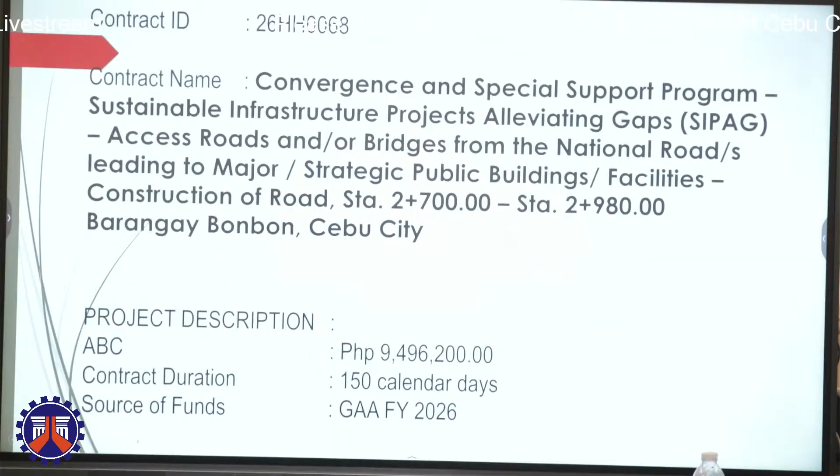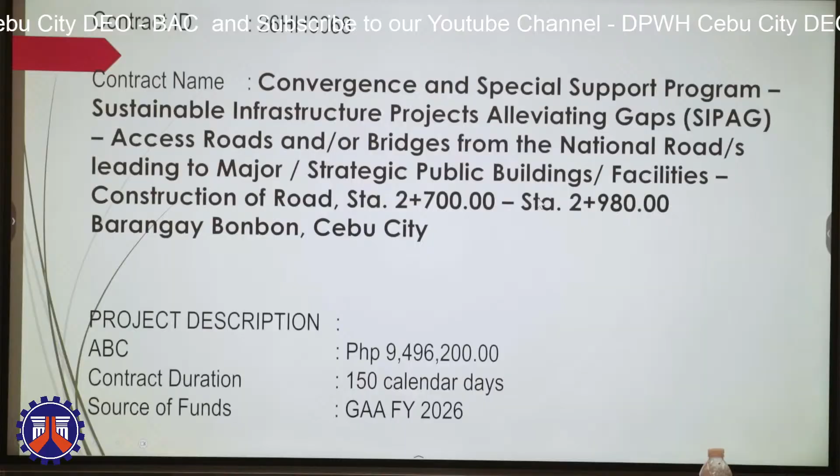For our first project with the contract ID 26HH0068, contract name Convergence and Special Support Program, Sustainable Infrastructure Projects Alleviating Gaps, Access Roads and/or Bridges from the National Roads leading to major strategic public buildings or facilities, construction of road station 2700 to station 2980, Barangay Buot, Cebu City, and approved budget for the contract of 9,496,200 pesos only, and contract duration of 150 calendar days. Source of funds GAA FY 2026.

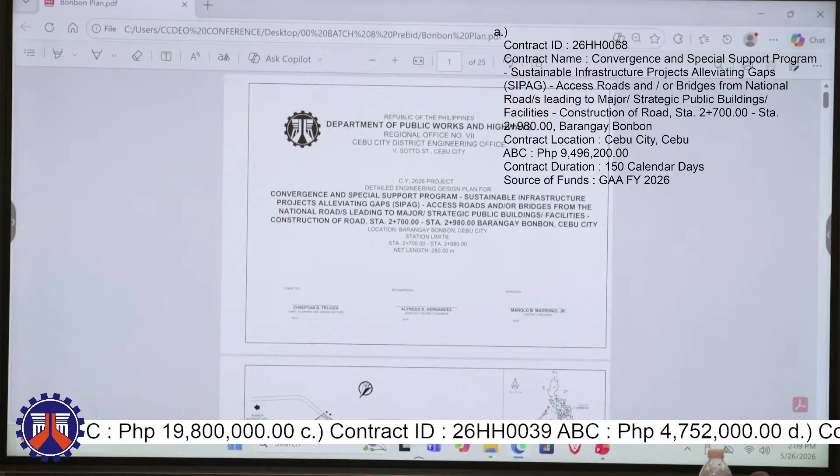So here we have the net length for this project is 280 meters. Then we have the location plan for this project. We also have the geotag photos for easy navigation. Proceeding to the scope of work, we have surplus common excavation, structure excavation, pipe culverts and drain excavation, and embankment. For the PCCP, we have subgrade preparation, aggregate sub-base course, PCCP 0.20 meters thick, 14 days curing. For the drainage structures, we have pipe culverts, line canal, stone masonry, and concrete curb.

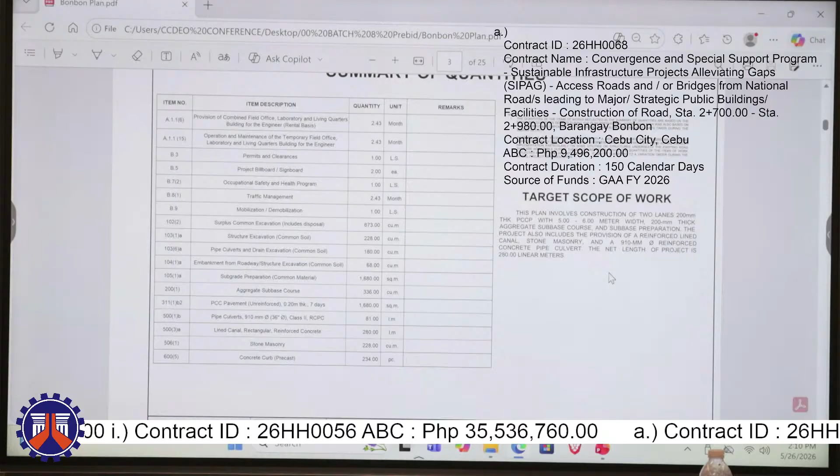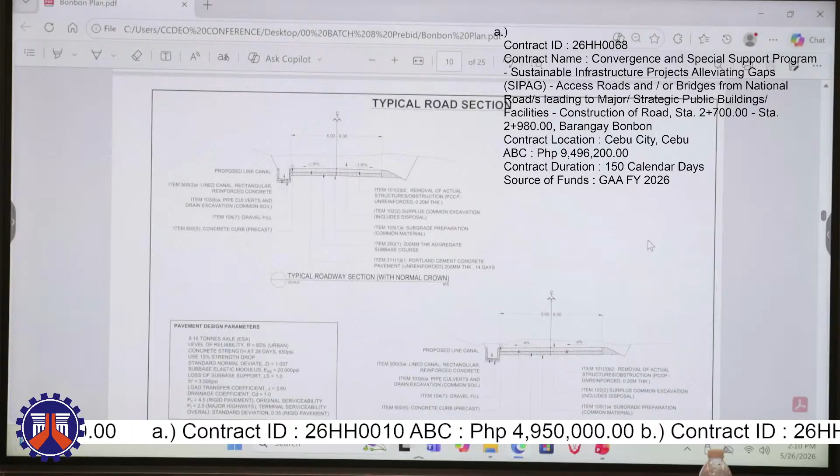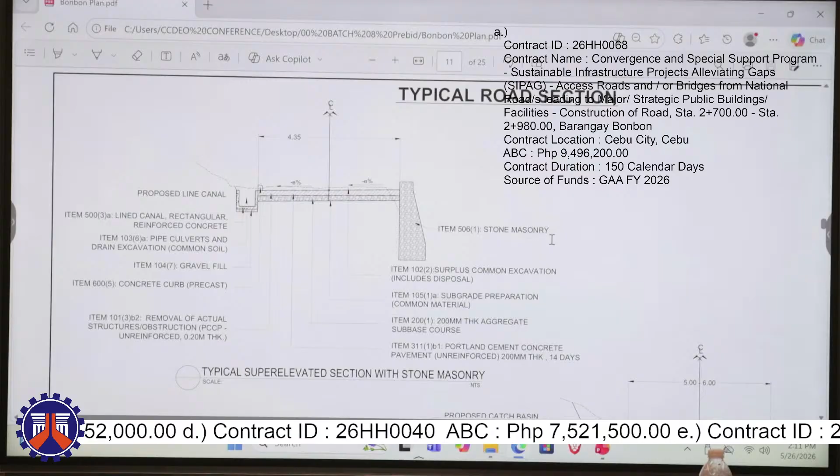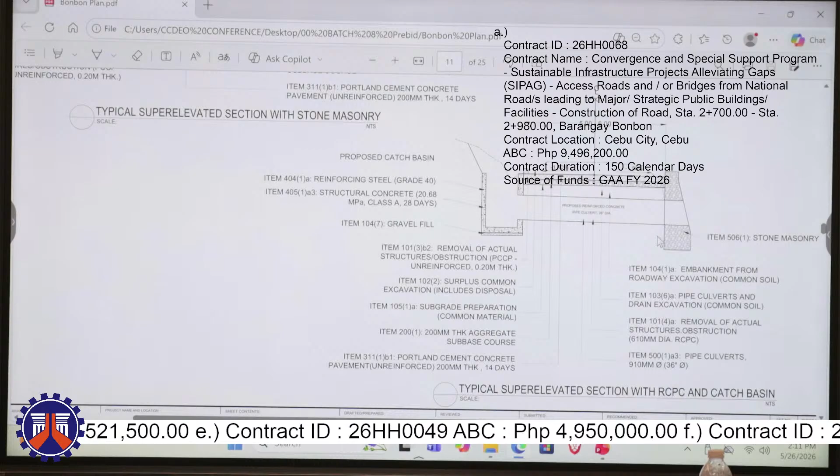So this plan ranges from 5 to 6 meters in width, 200 millimeters aggregate sub-base course, then 910 mm reinforced RCPC. Here we have the general notes and technical specifications, and the typical roadway sections. As you can see, left side line canal, and the shoulder on the right side. Here we have the super elevated section, still left side line canal. Then the typical roadway section with the right side stone masonry. Lastly, the cross drain: left side catch basin, right side stone masonry. I think that's all for this project.

To continue, we have the contract ID 26HH0069 with a contract name, Convergence and Special Support Program, Sustainable Infrastructure Projects Alleviating Gaps, SIPAG, access roads and or bridges from the national roads leading to major strategic public buildings, facilities, rehabilitation of road with drainage, station 0+163 to station 0+288, Barangay Padilla, Cebu City, Cebu, with an ABC amount of 9,504,040 pesos only, and a contract duration of 170 calendar days.

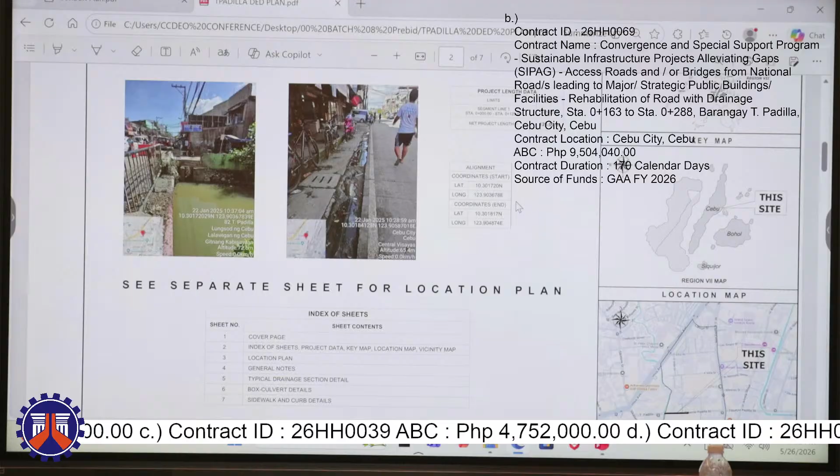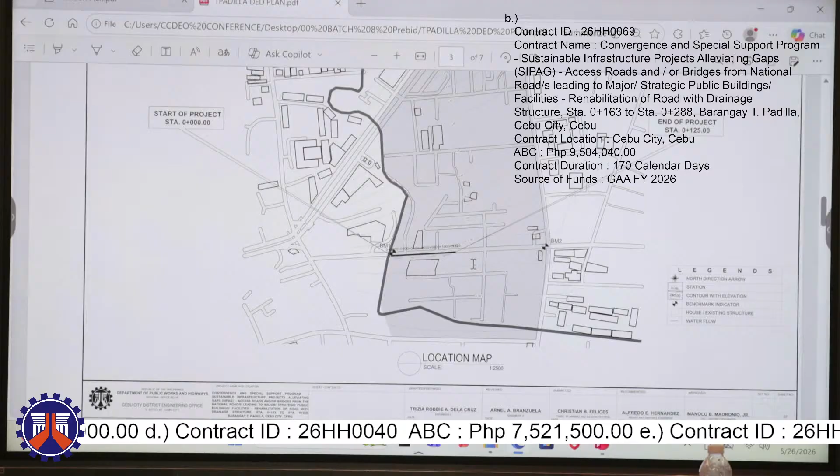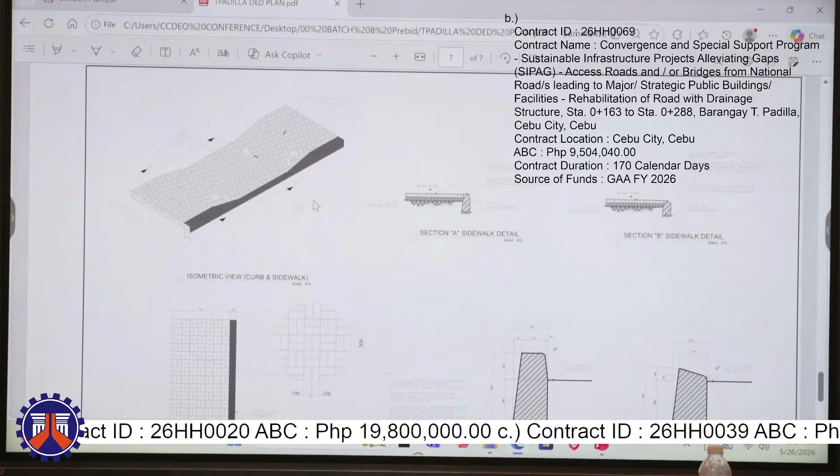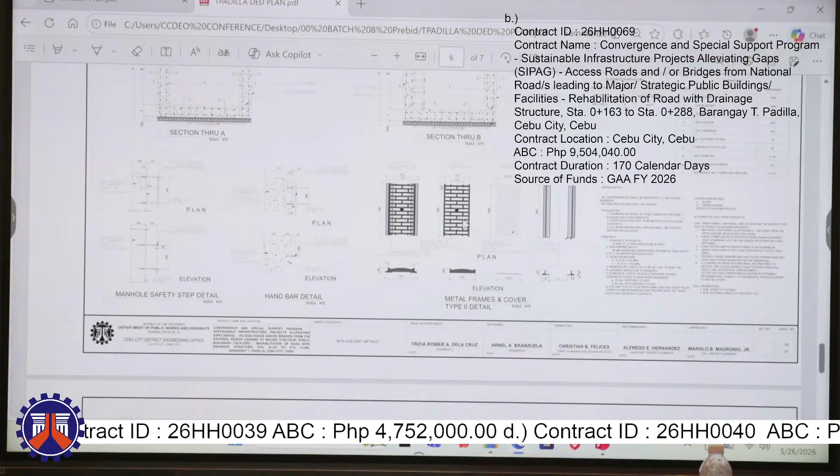And then for the typical section, we'll be constructing a box culvert intended to drain ang inundation sa area sa T. Padilla. Outfall ang Laug River. Also we have the typical PCCP. The thickness is 300 mm. And we'll provide sidewalk as cover and line canal. Magkonta og line canal bag-o. Also curb and gutter, and the steel grating manhole cover. Also naay mga details diri for depression sa atong sidewalk. So basically mo na ni ang scope for this contract ID 26HH0069.

Moving to the next, contract ID 26HH0070, contract name Convergence and Special Support Program, Sustainable Infrastructure Projects Alleviating Gaps, access roads and or bridges from the national roads leading to major strategic public buildings or facilities, construction of road station 2,600 to 2,870, Barangay Sirao to Barangay Guba, Cebu City, with the ABC amount of 23,422,000 pesos only. Contract duration of 105 calendar days and source of funds GAA FY 2026.

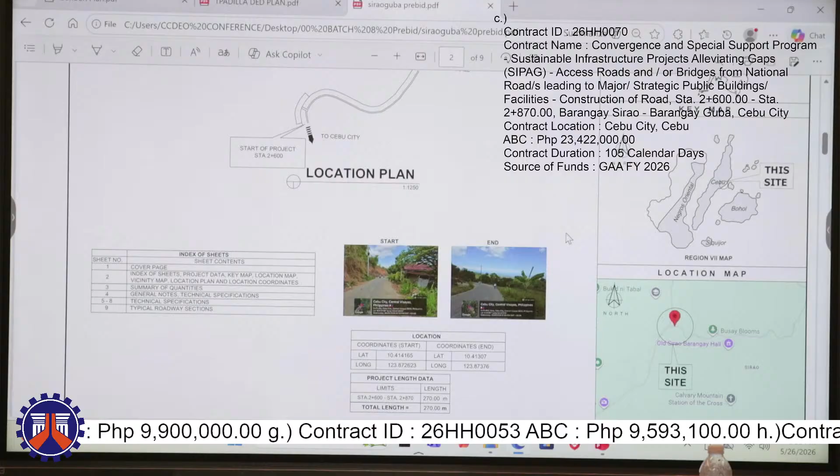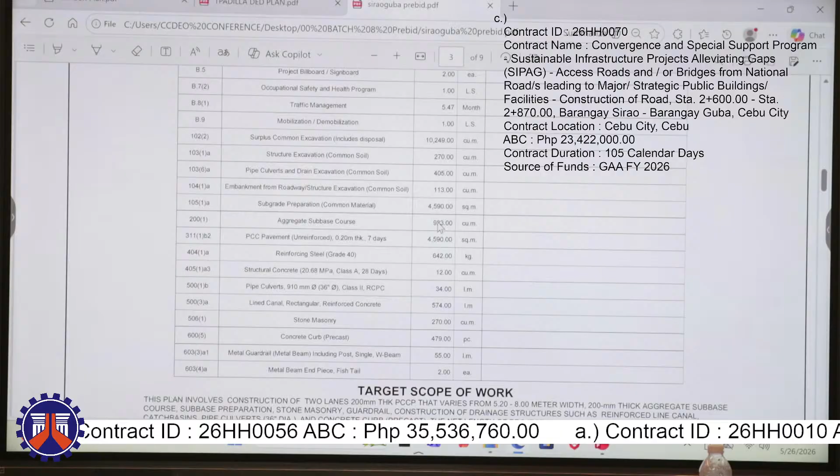So, as you can see, the net length for this project is only 270 meters, and the location is along the national road. We also have the coordinates so that we can easily navigate through the site. Next is the summary of quantities. The scope of work includes surplus common excavation, structure excavation, pipe culverts and drain excavation, embankment, and for the PCCP, subgrade preparation, aggregate sub-base course, PCCP 0.20 meters thick, 7 days curing. For the catch basin, reinforcing steel grade 40 and structural concrete, and for the drainage structures, pipe culverts 910 mm, line canal, stone masonry, concrete curb, and lastly, guardrail.

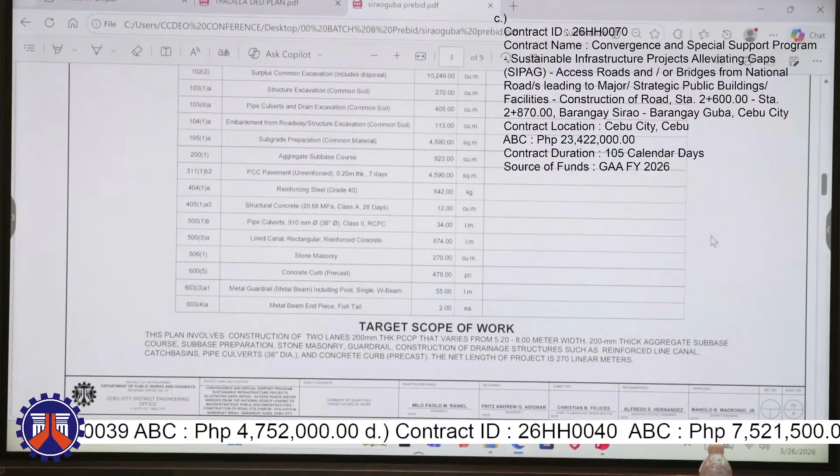The width of the road for this project ranges from 5.2 to 8 meters, 200 mm thick aggregate sub-base course, then 36 inches diameter RCPC. Here we have the general notes and technical specifications for this project.

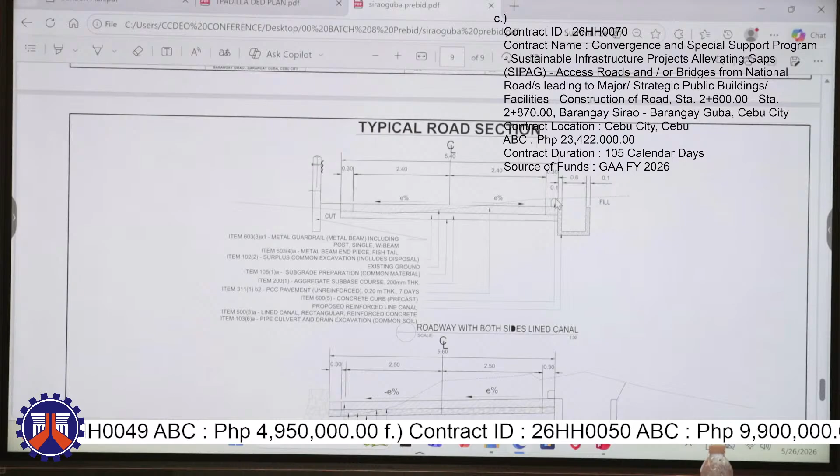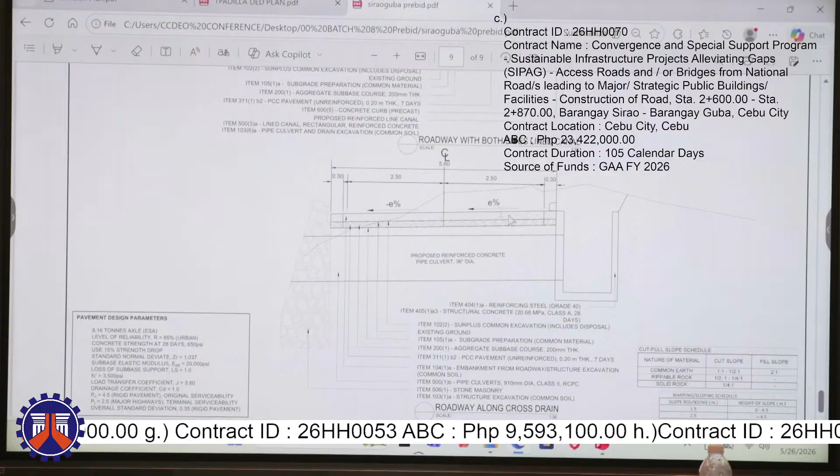Then we have the typical roadway section. Here we have left side guardrail and right side canal. We also have the concrete curb. And then next section, we have the cross drain. Right side catch basin. Then left side stone masonry with 5.6 meters in width. I think that's all for this project.

Good afternoon. For our next project, we have contract ID 26HH0071, Convergence and Special Support Program, Sustainable Infrastructure Projects Alleviating Gaps or SIPAG, access roads and/or bridges from national roads leading to major strategic public buildings facilities. Construction of road with slope protection structure, Station 6+700 to Station 7+420, Barangay Buot, Cebu City, Cebu. Our approved budget for the contract is 37,984,800. Contract duration is 234 calendar days, and our source of fund is GAA FY 2026.

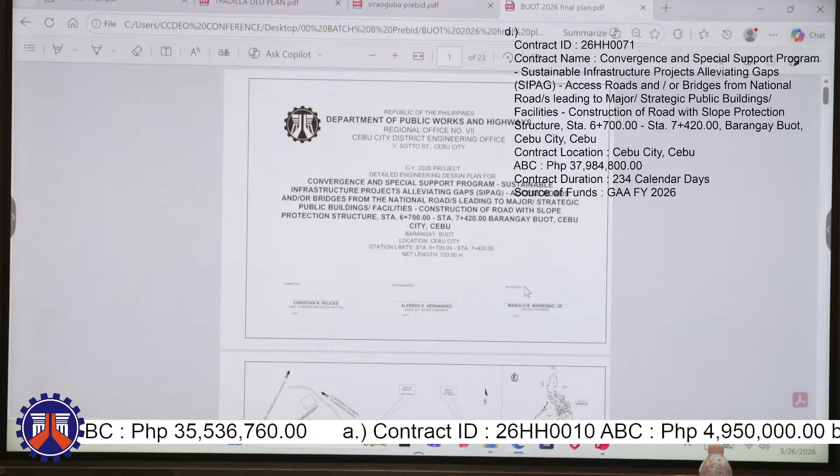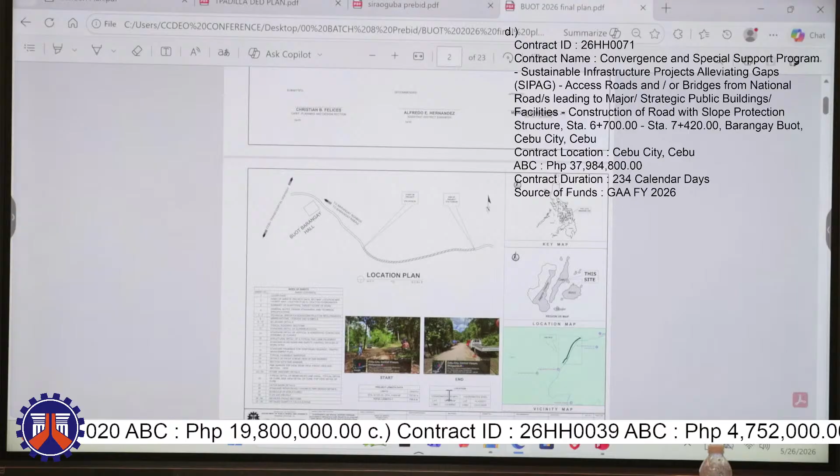So our net length of the project is 720 meters. Project is located after Buot Barangay Hall. This is the continuation of the previous project, year 2025. So this is our start. Then we end after 720 meters. This one. And our summary of quantities.

We have removal of existing structures, PCCP. We also have removal of concrete, surplus common excavation, structure excavation for the slope protection, pipe culverts and drain excavation for the drainage structure, embankment from roadway structure excavation, gravel fill for the drainage structure also.

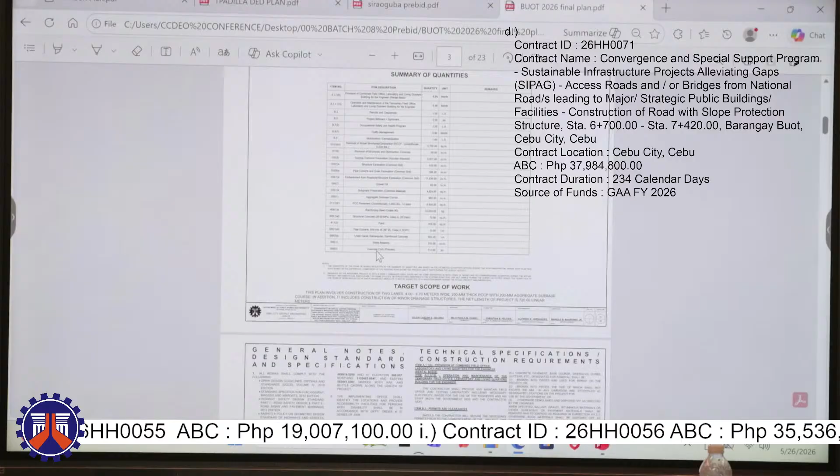For the main road, we have the subgrade preparation, aggregate sub-base course, and we have the PCCP pavement, 0.2 meter thick, 14 days. Reinforcing steel grade 40 and structural concrete is for the slope protection structure. Then we also have the paint for the concrete curb. Then we have the pipe culverts and lined canal for our drainage structure, the masonry also for the slope protection, and lastly, the concrete curb precast.

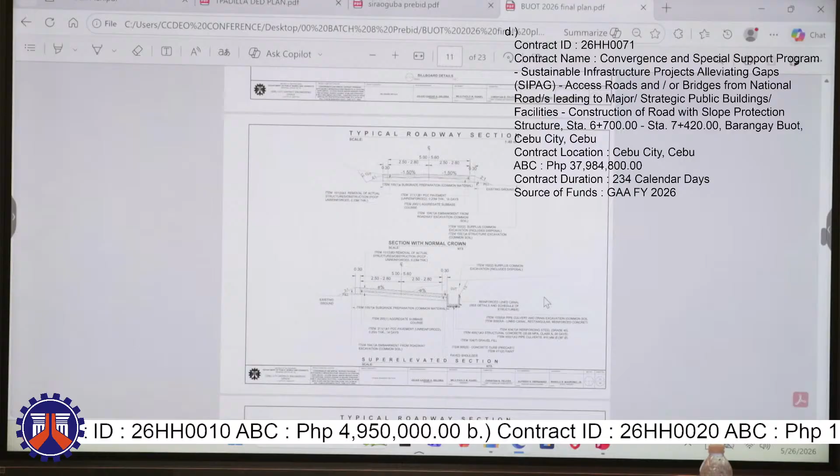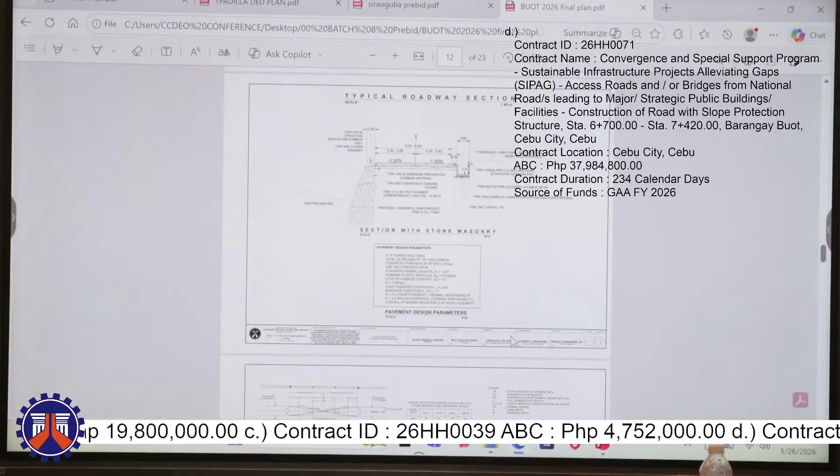This one is the general notes and technical specifications of the project. Then we have our details for the billboard. And we have the typical roadway section. First is the section for normal crown. Then we have super elevated section with the right side lined canal. And next is the section with stone masonry at the left side and also lined canal at the right side. Then next is the details for the super elevation and horizontal and vertical curves. Also, we have the structural detail for two-lane pavement.

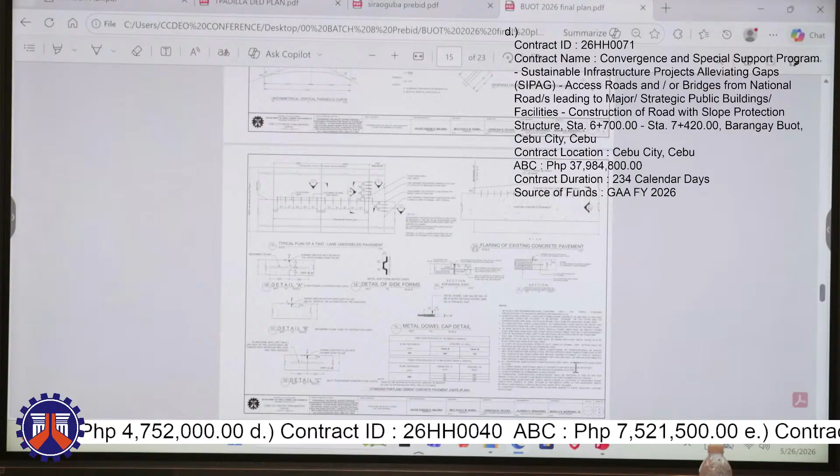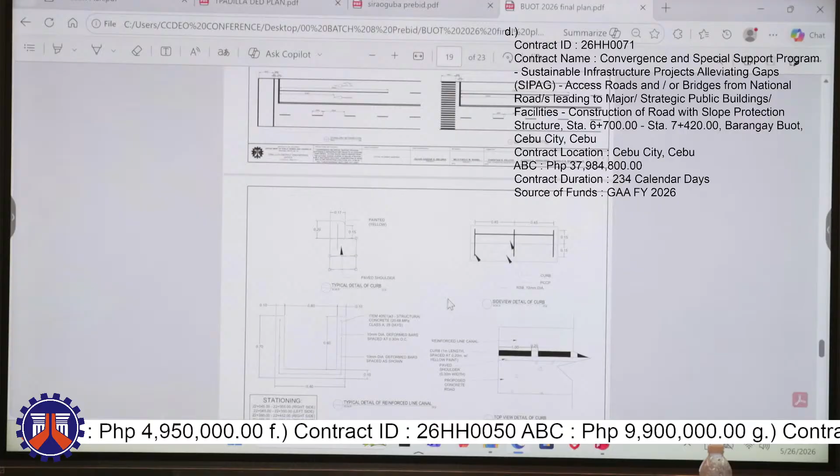Then we also have these safety control devices at sites. Then traffic management. Also, we have the typical pavement marking details. And this one is the lined canal details. Also included is the detail of curb. Then we have the catch basin details and our stone masonry details. And lastly, the details for the RCPC. And that's all for this project.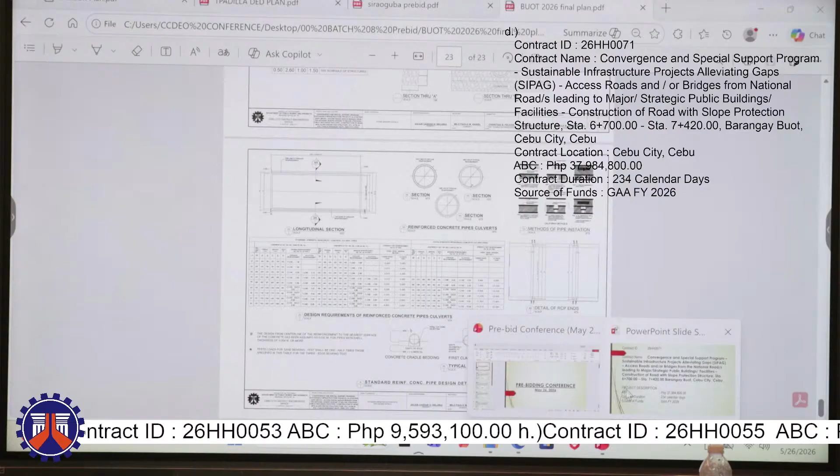To continue, we have the 26HH0075.001, Ensure Safe and Reliable National Road System, Asset Preservation Program, construction, upgrading, rehabilitation of drainage along national roads, primary roads, Bacalso Avenue, Cebu South Road with section ID SC00004CB, kilometer 4-014 to kilometer 4+134, Cebu City, with an ABC amount of 128,538,965 pesos and a contract duration of 313 calendar days.

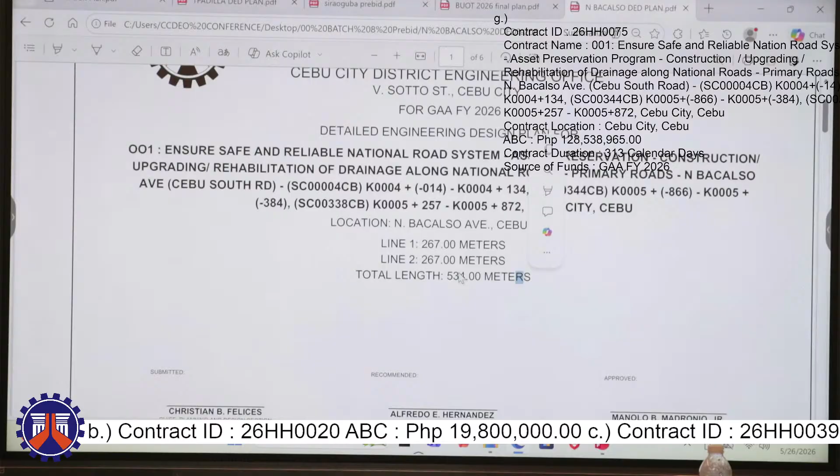So we have a total length. We have two lines for this one. We have line 1, we have 267 meters. And for the line 2, we have the same 267 meters and a total length of 534 meters for this contract.

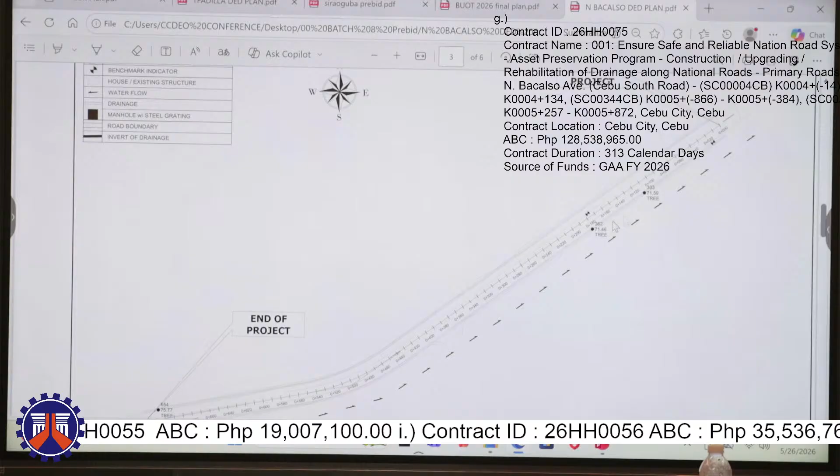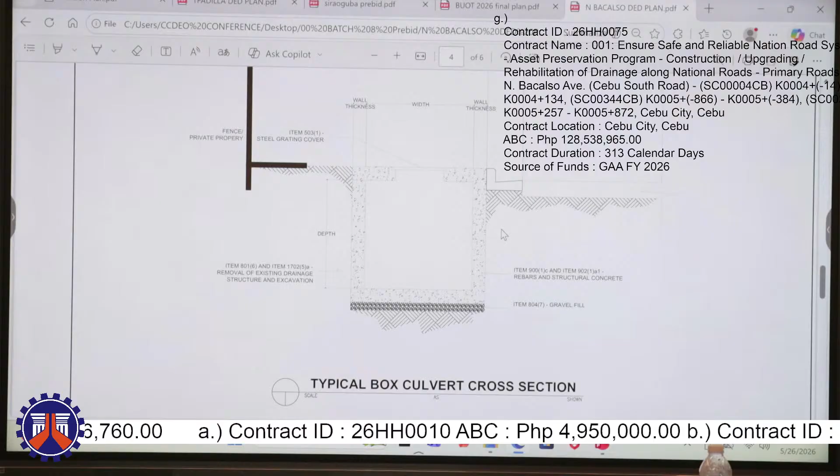So for the typical section, we have the typical box culvert cross section, no. Also included in our scope is the curb and gutter. And then also sidewalk for this box culvert. On top is a sidewalk, no. And also for the manhole covers.

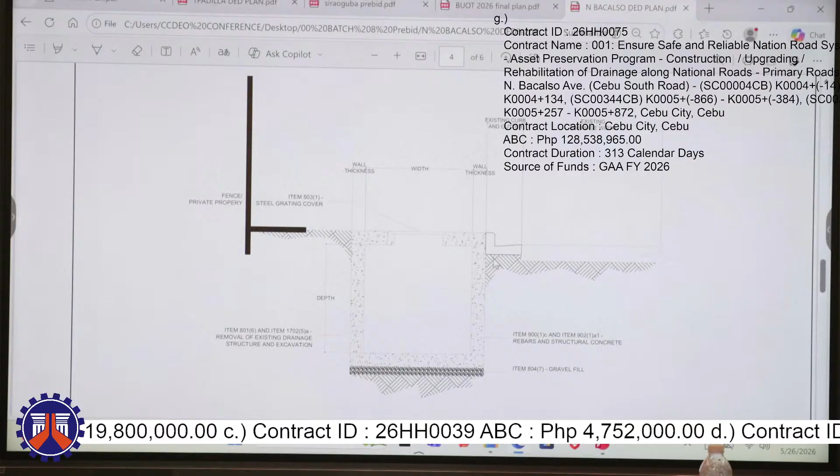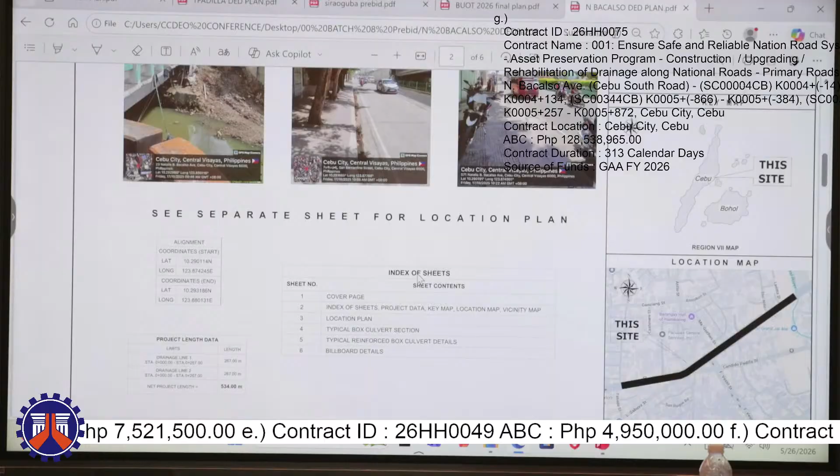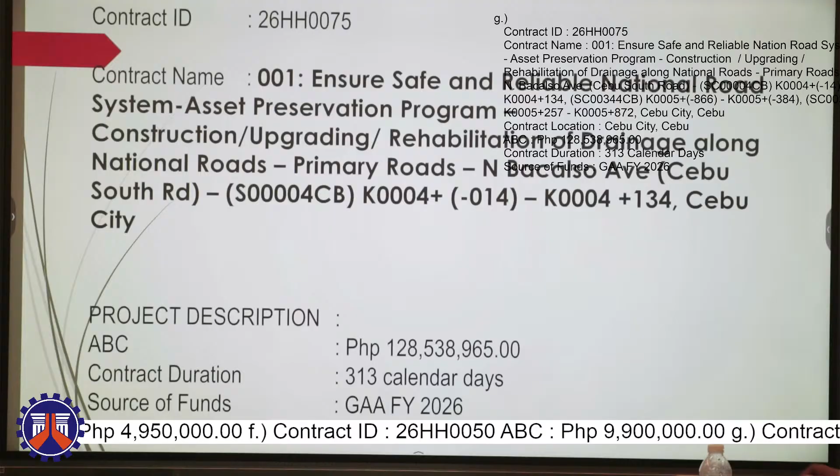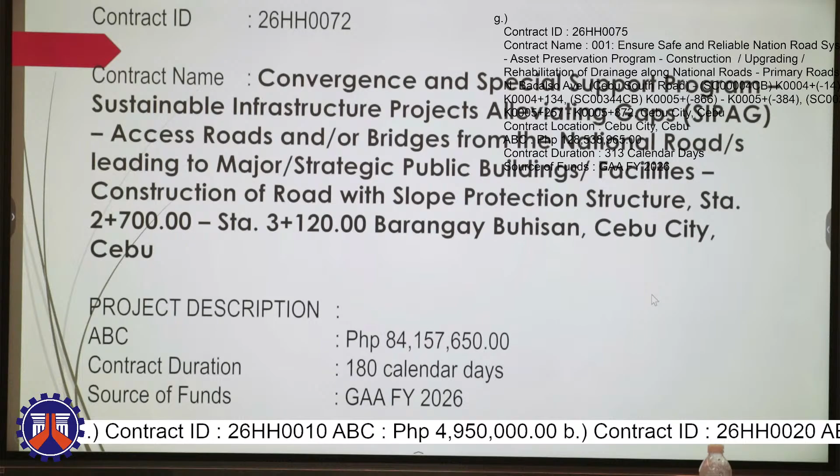To continue, we have contract ID 26HH0072. Contract name Convergence and Special Support Program, Sustainable Infrastructure Projects Alleviating Gaps, SIPAG, access roads and/or bridges from national roads leading to major strategic public buildings, facilities. Construction of road with slope protection structure, Station 2+700 to Station 3+120, Barangay Buhisan, Cebu City, Cebu. The approved budget for the contract is 84,157,650 pesos. Contract duration is 180 calendar days. And our source of fund is GAA FY 2026.

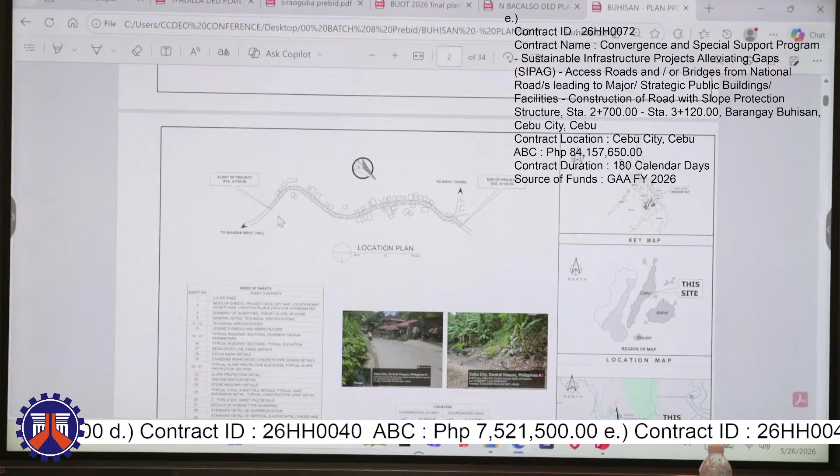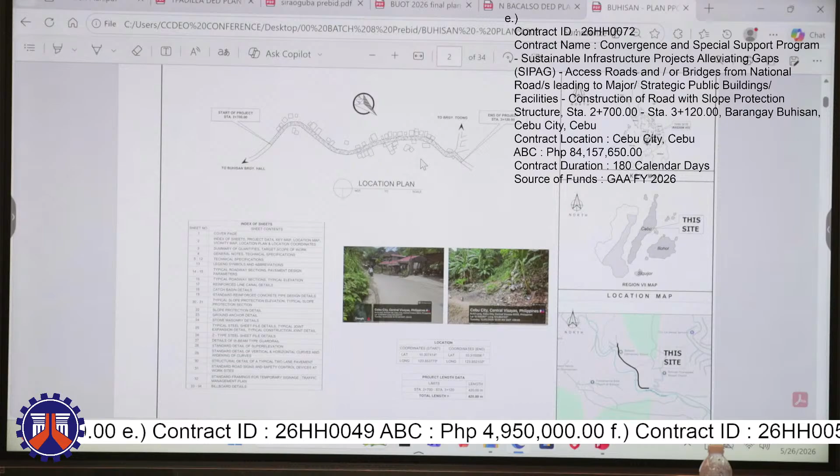So our net length for this project is 420 meters. The location of this project starts after the previous project, also from 2025 project. Also the same title, this one. We have the construction of road with slope protection structure. Then going to Buhisan Elementary School, this one, so as you can see here.

Then for our summary of quantities, we have a removal of PCCP, 0.2 meter thick. Then for our roadway, we have surplus common excavation, subgrade preparation, aggregate sub-base course, and PCCP pavement, 0.2 meter thick, 7 days. For our slope protection, we have structure excavation, shoring and cribbing, and also we have the item 404 and 405, reinforcing steel grade 40 and structural concrete, and also the stone masonry.

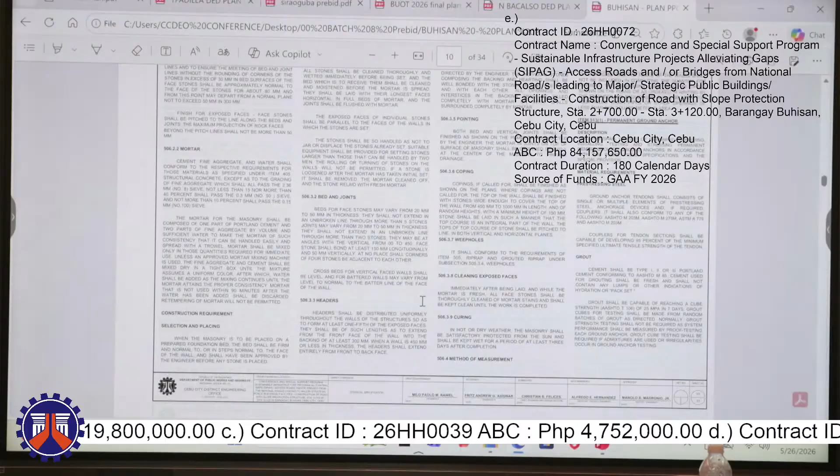Then for our drainage structure, we have pipe culverts and drain excavation, gravel fill, lined canal, rectangular reinforced concrete covers, manhole, and for road safety, we have metal guardrail and also metal beam end piece. This one is the general notes and technical specifications involved in this project. Then we have our legends and symbols, then our typical roadway section.

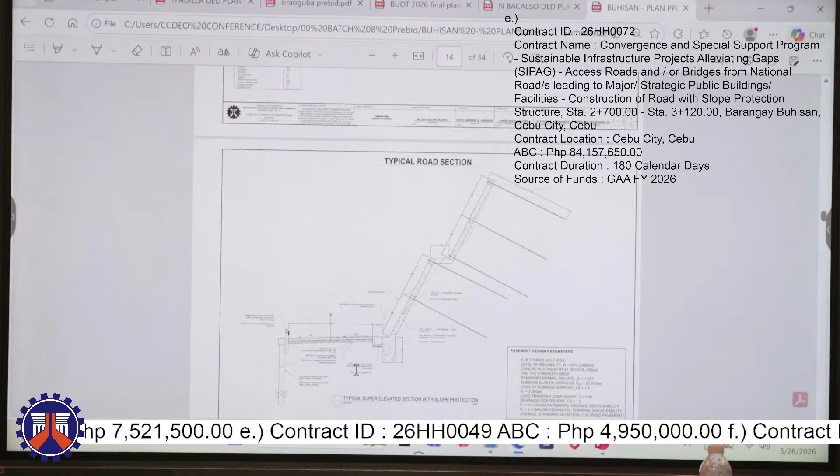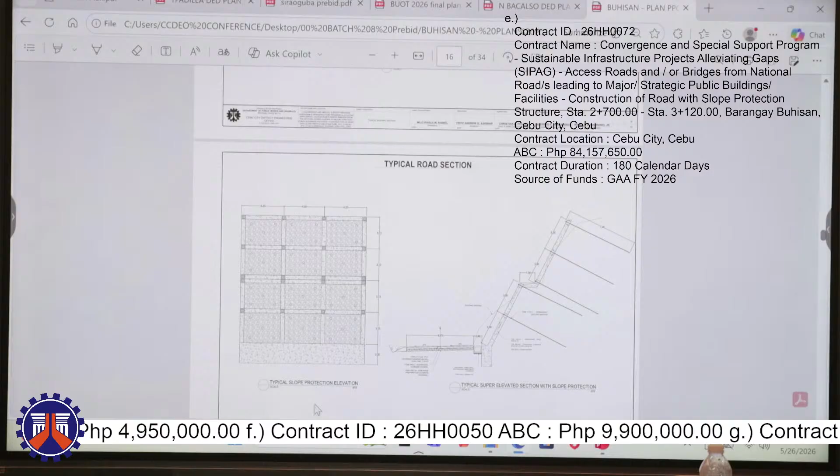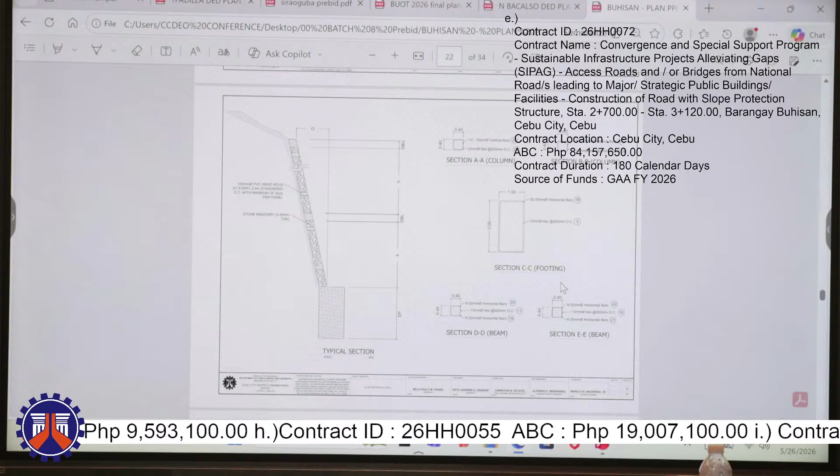First we have the slope protection structure at the right side. Then we also have this one, the structural steel sheet pile at the left side. And this one, only the slope protection at the right side. Then we have the typical slope protection elevation also. Then the reinforced lined canal details, also the catch basin details, then details for the RCPC. This one is for the slope protection details with the corresponding dimensions for the beam and columns, and also our ground anchor details.

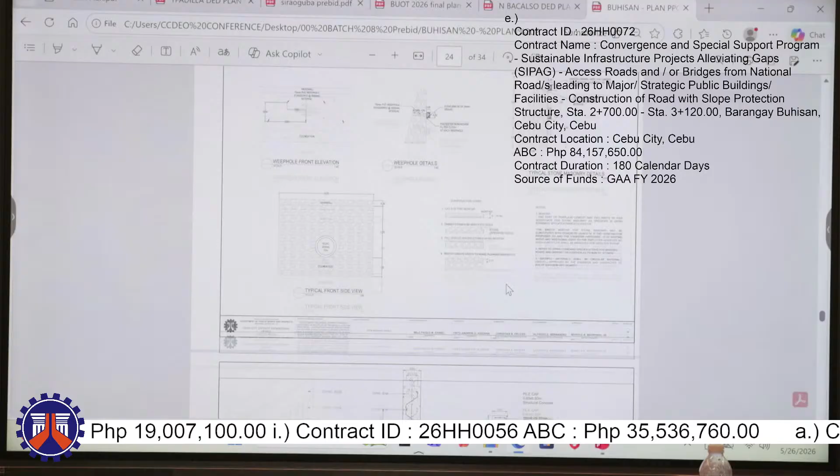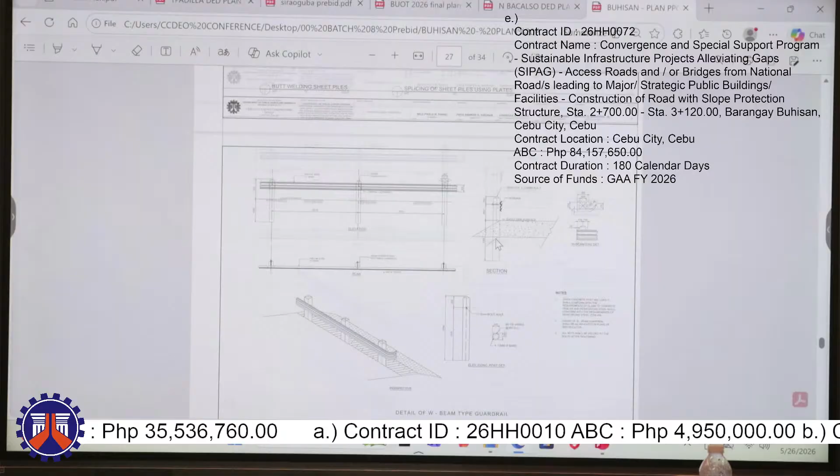The next is our outfall slope protection details. Then our sheet pile details. Then also the guardrail details. The details for the super elevation and horizontal and vertical curves. Also the PCCP details. Then we have our traffic management. And lastly, we have the billboards detail. That's all for this project.

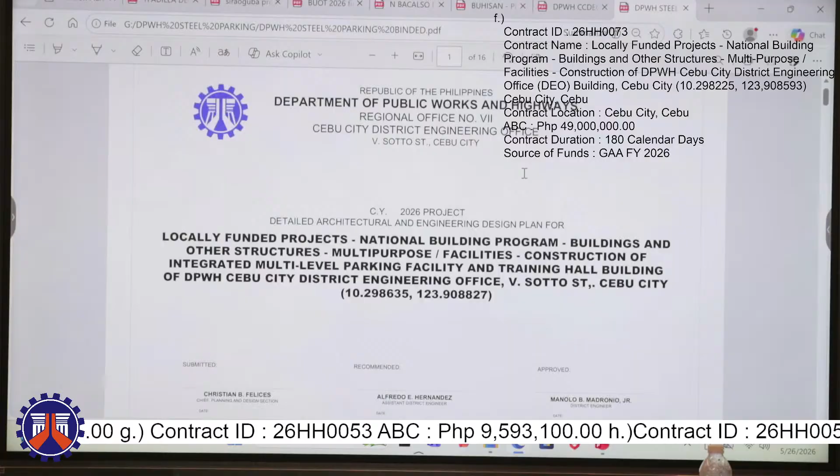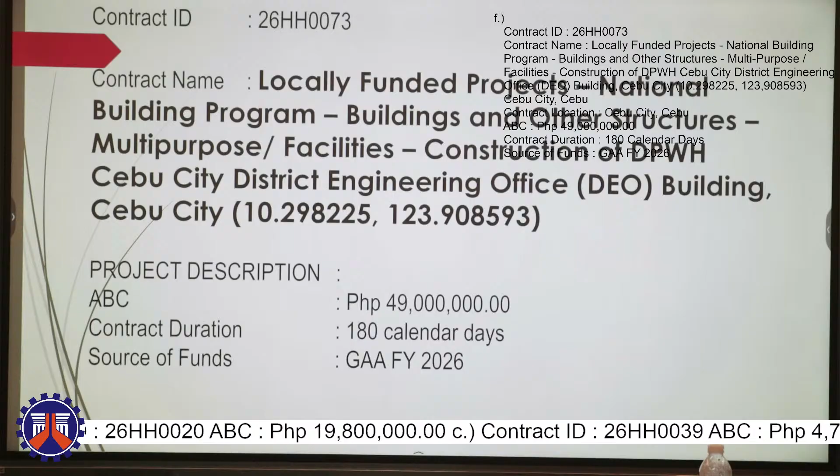So our next project is titled Locally Funded Projects, National Building Program, Buildings and Other Structures, Multipurpose Facilities, Construction of DPWH Cebu City District Engineering Office Building, Cebu City. The contract ID of this project is 26HH0073. The ABC of this project is 49 million and its contract duration is 180 calendar days. The source of funds of this project is GAA FY 2026.

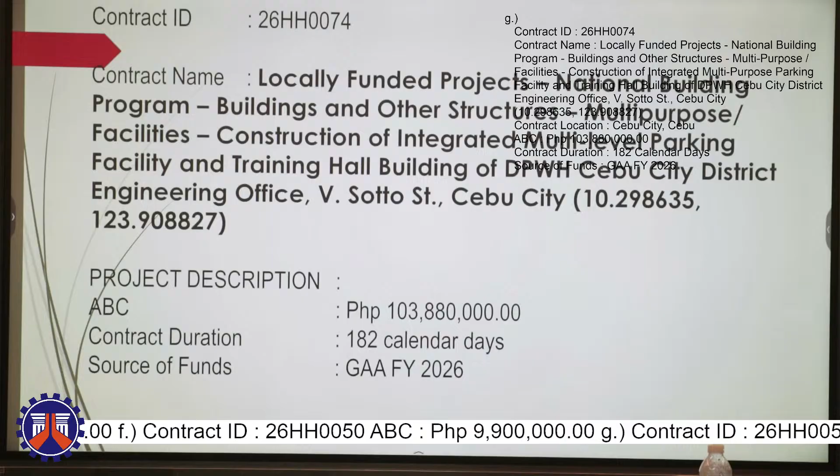Okay, to continue, next project, contract ID 26HH0074, contract name Locally Funded Projects, National Building Program, Buildings and Other Structures, Multipurpose Facilities, Construction of Integrated Multi-Level Parking Facility and Training Hall Building of DPWH Cebu City District Engineering Office, V. Sotto Street, Cebu City. The ABC is 103,880,000. Contract duration is 182 calendar days. And the source of fund is GAA FY 2026.

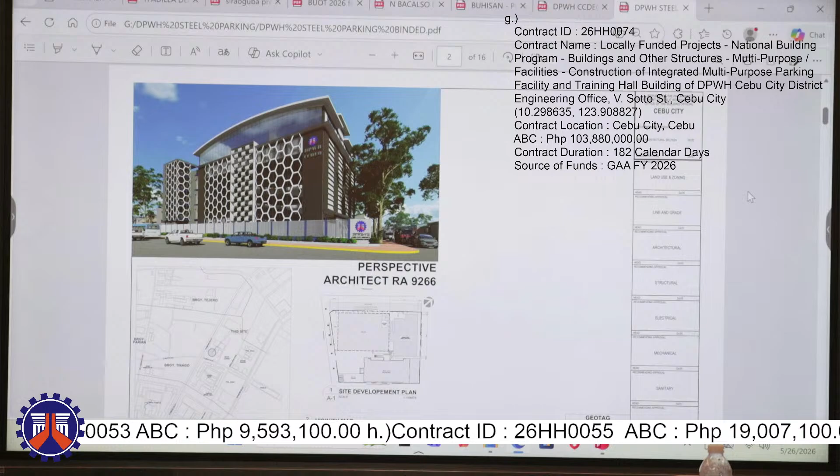So this is the perspective of our upcoming steel parking and multipurpose hall site development, and this is the floor plan.

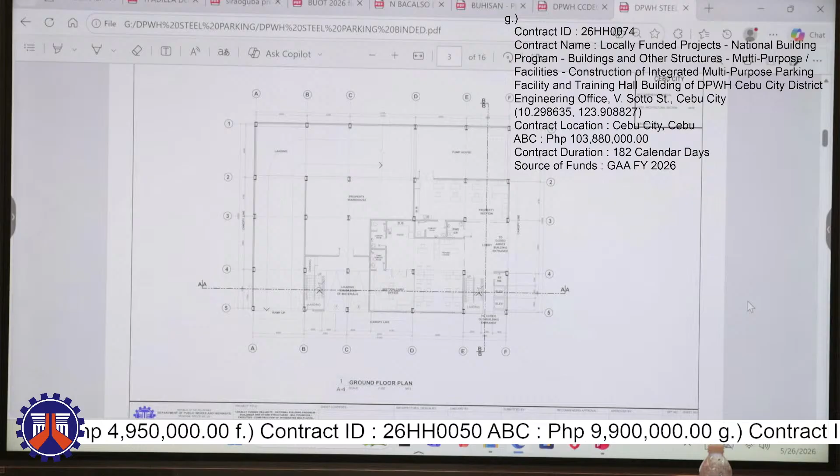So, this is the ground floor. And then, going up, most likely, more on parkings talaga. Then hanggang sa 4th floor. Then, after that,

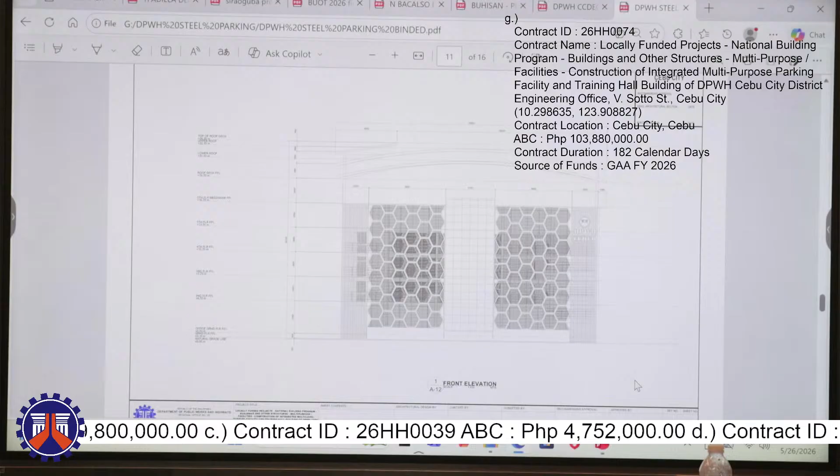So I think that's all for this project.